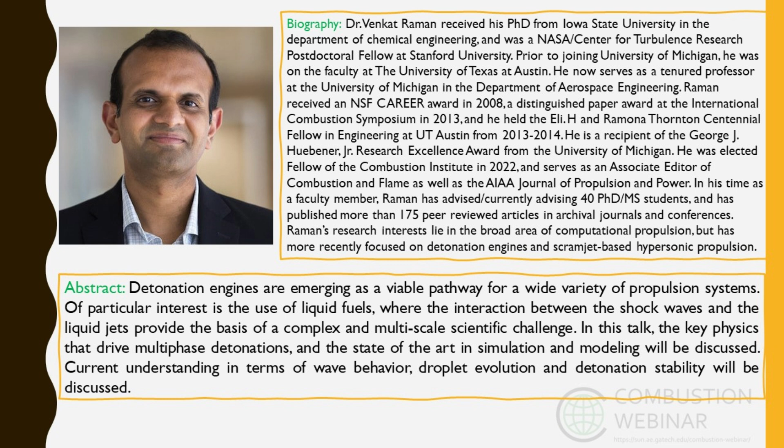The time is yours. Thank you, Peng. Thanks for the introduction. I have to say, I look through many of these webinars because it always shows up when I search for something, and it's always interesting to see what people are talking about. So it's a great effort to get people to come in and present.

So I'm very excited to talk about this, detonation engines. I've been working on this for 8 years now. We got started in 2016 when the Department of Energy wanted to look at detonation engines for application in gas turbines. And so we started looking at what it means to simulate these engines, what are the core physics. And over the years, we've learned a number of things, some good, some bad, but this is what we have learned. So I'll go through them.

This talk is in two parts. The first one focuses mainly on the gas-based or gaseous detonation engines, and the second part on the challenges with liquids. Now, the gas phase we understand a lot more clearly because it's simpler compared to the liquid phase. So the tone is different for each one of them.

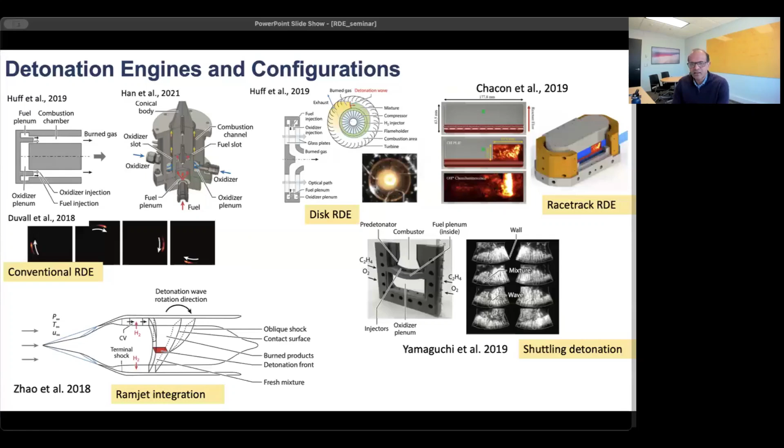And of course, all of this can be integrated into any flow path, whatever Mach numbers. So this, for instance, is an example of integration into a ramjet, and it can be put into scramjets and so on. So it's very versatile, and so that's the main advantage here. Now, of course, none of this comes without a price to pay, right? So why don't we have functioning detonation engines today that are as good as gas turbines?

And the problem comes from the fact that if you think about detonation, they're always studied using premixed fuel-air mixtures. So this is the typical system that's used for detonation research. RDEs, like the picture shown on the left, sort of go away from this ideal scenario. So in detonation engines, you can see that there are 2 cylinders, and between the cylinders, there's a detonation wave that propagates in the circumferential direction, and fuel and air are fed from the bottom, and they mix, and then the mixed mixture is what is being detonated.

Now, because this mixing happens through an unsteady process, it's never complete. You do not get full fuel-air mixing. There's always a distribution of reactants. So the equivalence ratio changes across the system. As a result, the detonation waves are never ideal, and they are actually far from ideal.

And so their structure is very dependent on the mixing, like how well you mix things changes what kind of detonation you get. Not only that, you may not have one detonation wave, but multiple waves that are moving back and forth, sometimes together, sometimes in opposite directions, and so on. And they're very geometry dependent. So in this sense, it's almost like thermoacoustic instability. So you cannot study them in abstract and hope to reproduce a practical system. You really need to study the system itself because wave reflections, interaction between injectors, all of these things become critical. So it is a complex device.

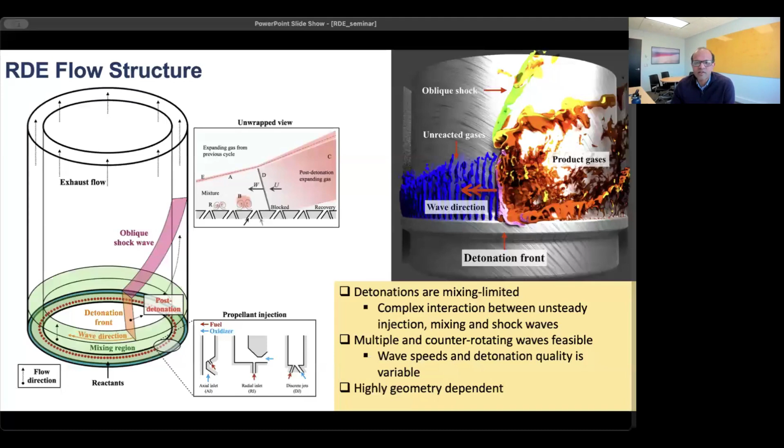So the way I want to talk about it is: what are the non-ideal natures of detonation engines? What is it that we need to focus on? What computational tools have we developed to address these issues? And what do we know about liquid injection in the same systems? Because if you have practical gas turbines or propulsion systems, you do not want gas injection alone. It has to be liquid injection.

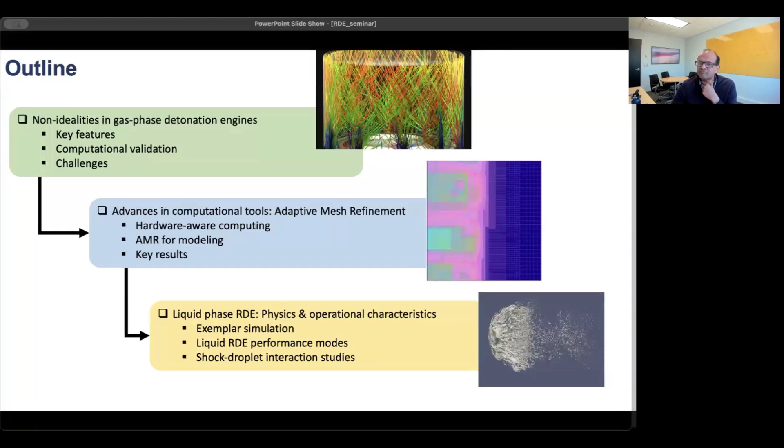So for the computational approach, there are many different ways to think about it. But if you look at the most detailed simulations, they all solve Navier-Stokes equations. They capture the shock, which is a requirement. You cannot fit the shock because the shock is moving very fast. You need to have an adequate resolution of the shock and reaction structure. And the large-scale motions, you need to be able to capture them. In addition, you need to be able to capture the geometry also, which can be sometimes quite complicated.

So the bottom right shows a rocket RDE from Air Force, which has a fuel injector on the inside and an oxidizer injector on the outside. That's only one pair. I think there are 72 of these pairs around the circumference. So this is a very complicated system overall.

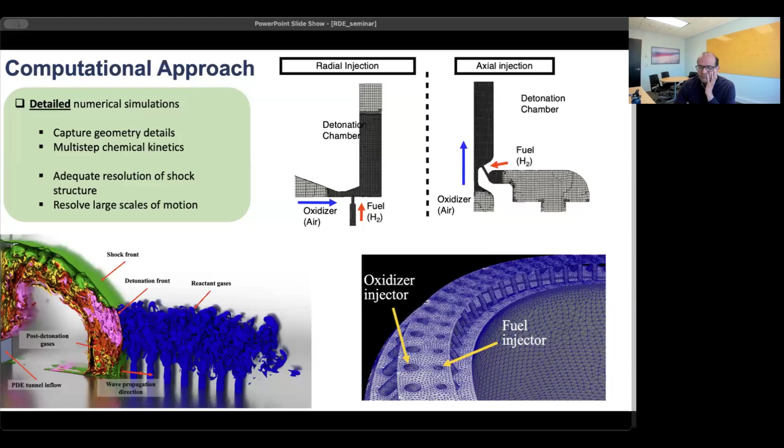So if you solve this flow, if you run these codes, what you see here on the top, these are movies, and once I click somewhere, it's going to start running. But before that, the top half is a geometry from Air Force. The bottom half is a geometry from University of Michigan from my colleague, Mirko Gamba. And these are nominally operating at roughly similar mass flow rates, similar inflow conditions, hydrogen as fuel, air as oxidizer. But only the geometry is different.

And so if you see how this works, oops, that's not right. You can see the waves moving around. So in the top picture, you have two shock waves, two detonation waves that are moving together in the same direction. In the bottom picture, you don't see it right now, but it'll come back from the other side. There's only one detonation wave.

And what you can see on the right-hand side is a cut of one of the injectors. So there are hundreds of these, 120 injectors, I think, in this configuration. So this is one of them. And if you look at the cross-section, as the detonation wave progresses, goes over the injectors, they shut off because the pressure is too high inside and the pressure is not high enough for the fuel to inject or the air stream to inject.

So as a result, as the wave goes through, the injectors are shut, and after some time, the pressure expands outside. The injectors are unfrozen, so they start releasing their charges, and at that point, mixing again starts. So it's this stoppage of flow, flow blockage, that's the critical aspect.

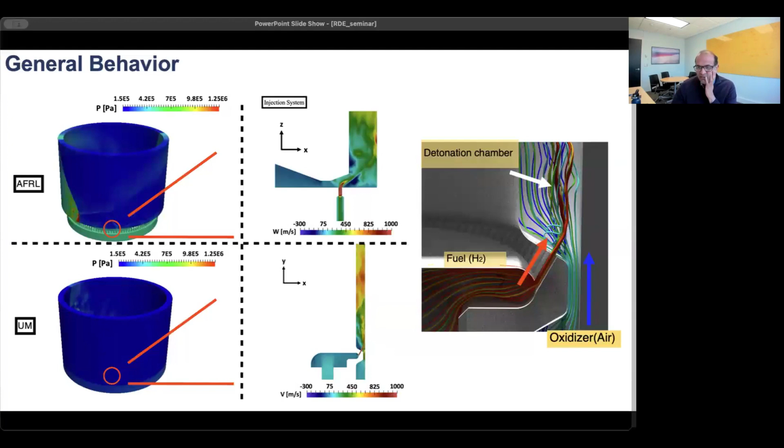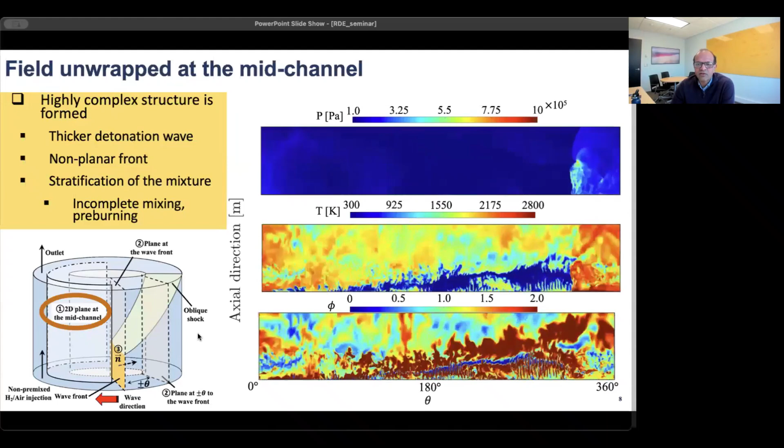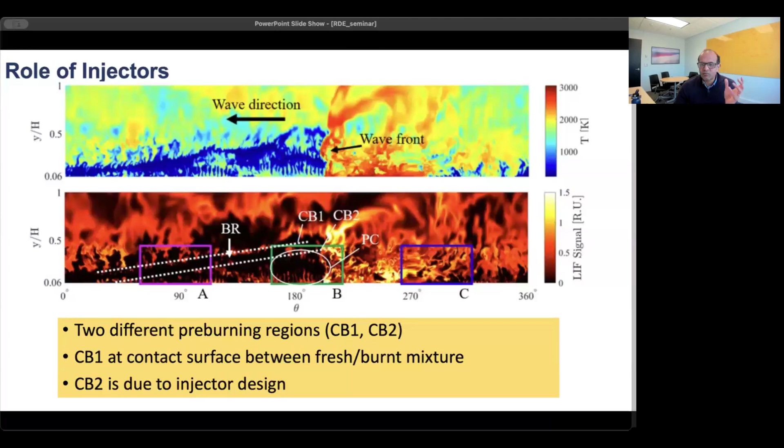And this variation is one of the key aspects that we really need to understand, the stratification of the fuel-air mixture. So if you think about the physics of the problem, what really matters is the fact that as the wave is moving, in front of the wave, the fuel and air is mixing in a very hot gas that's from the previous cycle of the shock wave. And that causes some kind of pre-burning, and it releases some of the heat at lower pressure. So that's a decrease in efficiency. And then whatever leftover fuel and air remains is now processed by the detonation wave. So there's this coupling between this pre-burning and what you have for the detonation itself.

All of this ties to what we call injector dynamics. So if the detonation wave has very different strengths, the way the injectors block and then release themselves will change. And so the level of blockage, the time for which they are blocked, all of this controls how much stratification you will get. So for instance, if the wave blocks the flow for a predominant part of the cycle, the fuel and air have very little time to mix before the detonation wave comes through. And so you will have a very stratified mixture through which the shock wave has to progress.

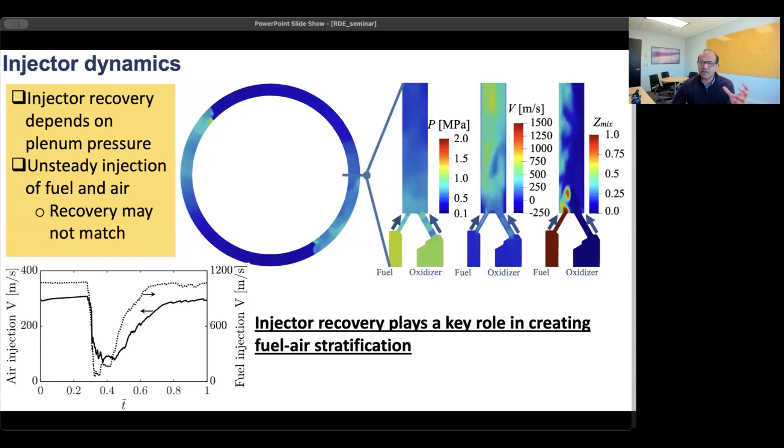So there's some kind of adjustment. The shock wave and the detonation wave respond to the fuel injectors, and so they set up some kind of equilibrium. And there's a coupling between this detonation process and the injection process. We will come to this in a second, but it's important to understand that the injectors are very critical for what's happening within the system. And if you change the injectors, you can change what kind of waves you get and what kind of wave speed you get.

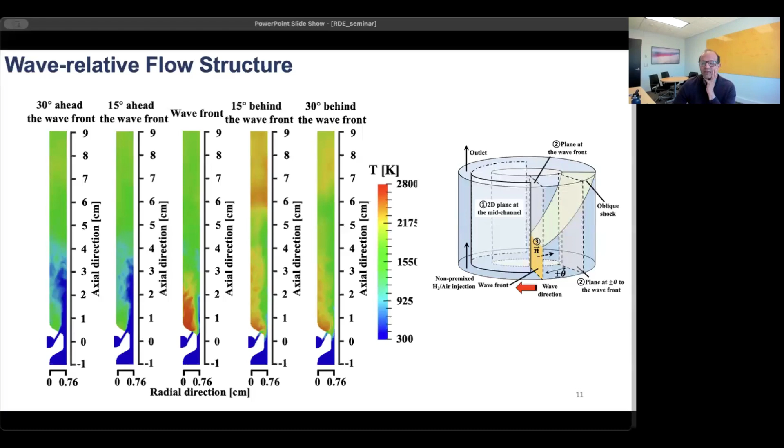So this is more details. It's not critical for now, so I'm going to skip this particular slide. What I want to get to is this coupling. And this is one of the lessons we learned from our study of the hydrogen combustor, is that there is a coupling between small scales and large scales.

But once you set up this stratification, there's a detonation wave that passes through, and that detonation wave now will have a particular strength, and that strength really depends on the stratification and so on, right? And so you'll have a certain number of waves, which we do not know how to estimate ahead of time, and they will have some wave speed that it goes through. And again, this wave speed and this number of waves dictates how fast the injector will recover.

So there is this coupling between the injectors and the detonation process, which is the entire RDE. And the funny part is we know this coupling exists. We're now able to write it, but we are not able to figure out yet, and no one has figured out yet, what's the link between them. So for instance, if I design an RDE today, I cannot predict ahead of time how many waves will be in the system and how fast those waves will go. So there's no way to know.

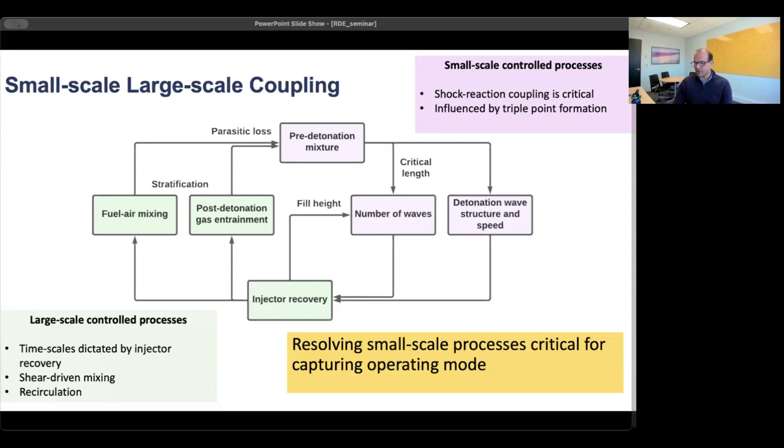All we can do is experimentally study it and notice how many waves we have. There are certain things we can figure out. Like for instance, if you keep increasing the mass flow rate that goes through the injectors, we know that more waves can be formed. So that's almost given. But we cannot predict a priori what we call the operating mode of the RDE, number of waves and the wave speed. So this still remains a very big challenge. So that's what this slide tells you.

Like, we can predict certain things, maybe like pressure or things like that. But if you really look at the details, simulations very rarely predict experiments accurately. You cannot predict the wave speeds in the experiments. And if you do predict the wave speeds, what you'll find is the pressures that you predict are not correct. So there's something missing in the simulations that we have not yet figured out. It's unclear. And different people will say different things. It could be chemistry, it could be the numerics that we use, it might be lack of resolution. So there are all these variables that are still there.

But this is common. Like, some simulations do show good agreement with experiments, but then we do not know what is the reason for that agreement either, because the methods used are very similar and so on. So this is something to keep in mind. Now, if you really want to make another step towards understanding these RDEs, the best thing that can be done computationally is to make sure that the detonation waves are fully resolved. You put as many grid points as possible to get all the structures within the detonation wave.

And typically in the field of detonations, adaptive mesh refinement has been used for many, many decades now. So starting with Professor Elaine Oran in the 90s, the use of AMR has been very prominent. So this is something that's very common. What has happened more recently is that these tools have been scaled on supercomputers, so we can run much bigger problems now than what was feasible before.

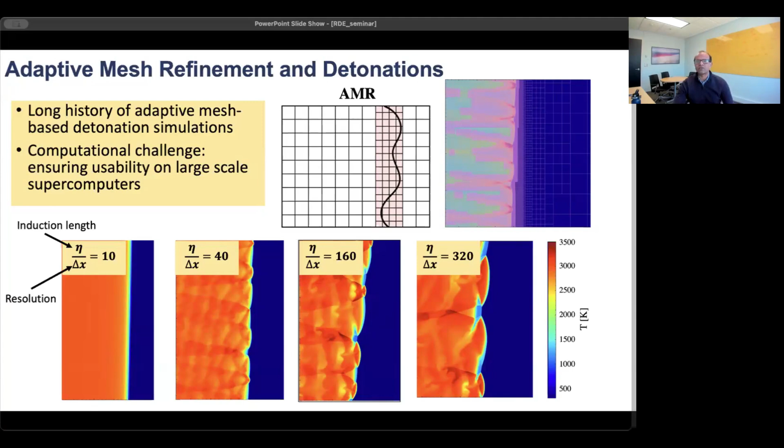And if you go to 160, you see these jets that come out. And if you go to 320, they're much sharper, but the structure does not change all that much beyond that. So what this tells us is that you need grid resolutions comparable to about 200 grid points per induction length, which is a very difficult task for practical detonation engines. You need a very large simulation capability to do something like that.

The other point I want to make, and I always talk about this, and I want everyone to understand what is going on in the supercomputing world, because sometimes this information is lost in all the messages that come out. Fitting these big calculations on a supercomputer is not a trivial task, and anyone who does supercomputing will easily understand this. What has happened with supercomputers in the last 10 years or so is that we have become more and more reliant on certain kinds of specialized hardware that are typically designed for machine learning applications, not for the kind of computations we do.

And as a result, what has happened is that we can do a very large number of grid points, like billions of grid points, but only for a very short time, like microseconds or milliseconds.

What we cannot do is very small number of grid points for hours of simulation. We cannot do that. So if you take an RDE and you want to see what is the temperature on the walls, to reach the thermal steady state, you'll have to simulate maybe like 20 minutes of RDE operation. That's virtually impossible today with any calculation. If you look at most simulations, they run for about 5 to 10 milliseconds if you're lucky. That's the longest duration that it's run.

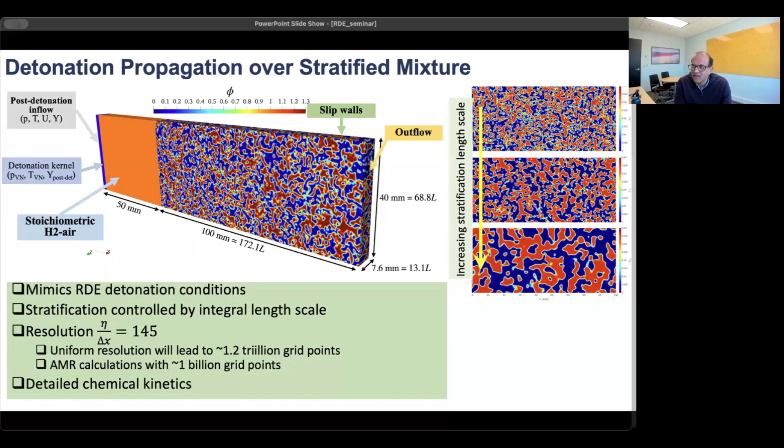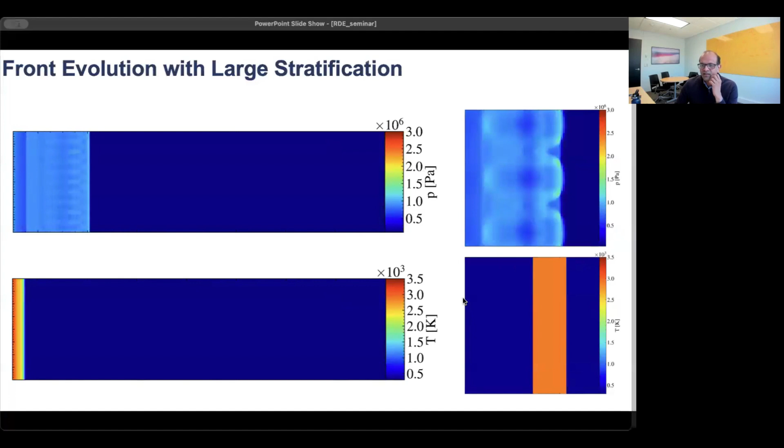So I'll show you a picture. I don't know which one of these I need to click to make it work, but I'll run all of them simultaneously. On the top is pressure, bottom is temperature, and on the right-hand side, they're zoomed-in versions. And they're going through the stratified mixture, and you can see that the detonations are no longer very regular. There are pockets that are unburned. The wave moves in different directions, and they're in general less efficient at processing the fuel air mixture than if you had a uniform concentration across the domain. So this is the kind of result that we were looking for to really understand what is the role of stratification.

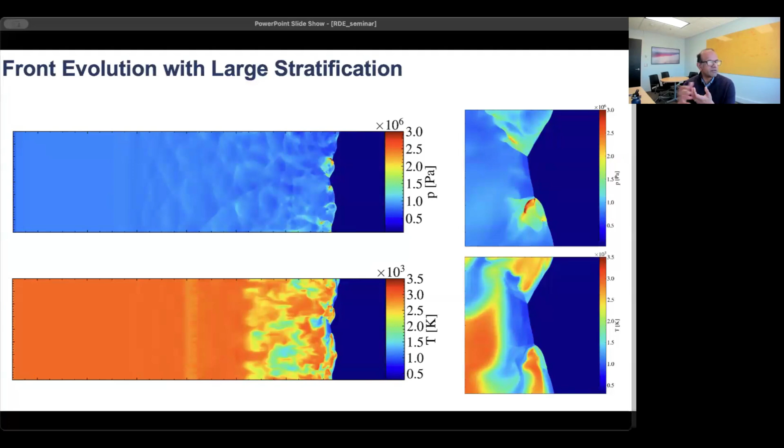So what it tells us is that if you have stratification, there are pockets that are unburned, and as a result, the heat release that would have come from burning those pockets is not available to push the wave. So the wave sort of slows down because of this inefficiency. There are more details here, but essentially, what the process tells you is that you have a very different kind of detonation wave compared to what you would have for a uniform mixture.

So I have these movies on the right-hand side, which tell you how this detonation front looks if you vary the fuel air mixture over small length scales as opposed to a larger length scale. And you can see here that the corrugation and the change in location really depends on the stratification. So if you have large scale stratification, big blobs of fuel and air everywhere, the wavefront is very corrugated. It can look like a premixed flame that's corrugated. But if you have smaller length scales, then it's almost straight. It doesn't have that many corrugations.

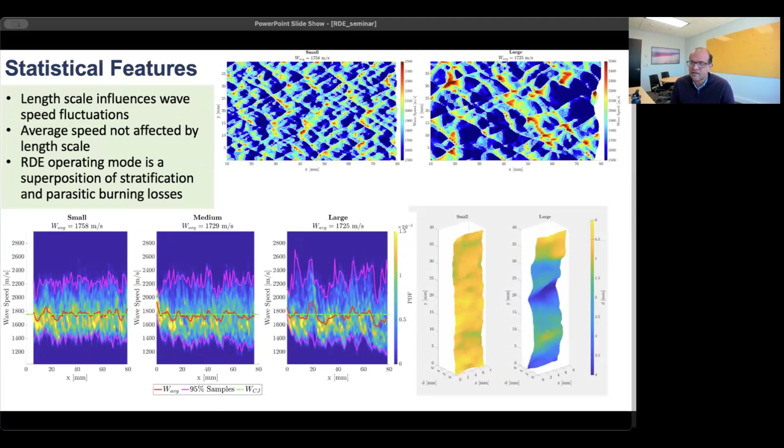So that is what we learned with gas phase RDEs. One of the main things is that there is a coupling between large and small scales. But the second important point is that there's inefficiency because you're not able to put in fuel and air uniformly. And so there's some loss of efficiency that comes from this. Now, whether it's good or bad is open for debate. That's a different topic, and I'm happy to explain this later. But we do not know if we need to have uniform fuel air mixture. But we do know that it has to mix to some level. Otherwise, you cannot sustain the detonation.

Now, practical devices cannot use gases. They have to use liquids. And so we started looking at liquid-fueled RDEs. Some of the pioneering work was done at University of Michigan like 60 years ago by Nicholls, and then a lot from Russia.

And now a lot more work is being done in China. And Piotr Wolanski, until he passed away a couple of years ago, was the preeminent researcher in Poland for these kinds of systems. And more recently, there's this experiment from Karim Ahmed at UCF on a detonation where we just saw it pass through, hitting a droplet, and you see what happens to those droplet structures.

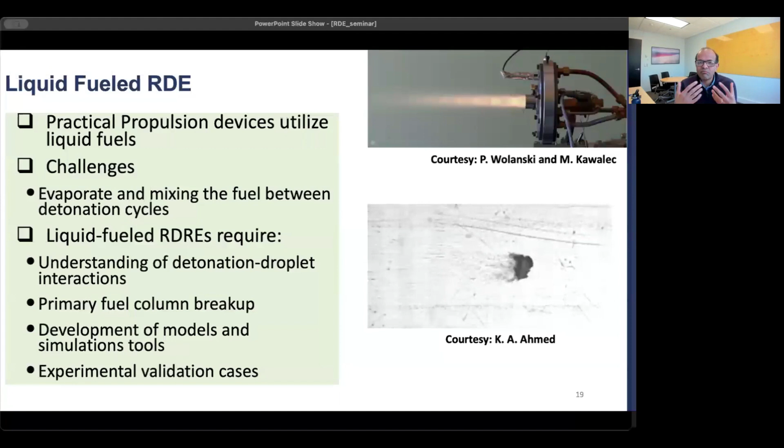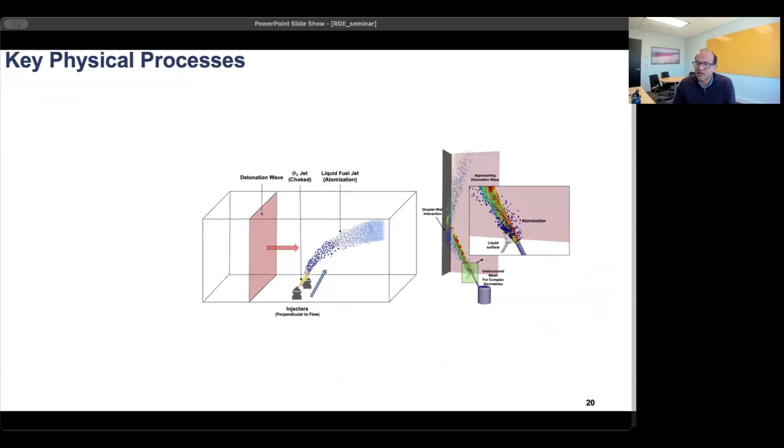So the real idea we want to understand is what happens if you have a liquid fueled RDE. What do we need to understand to make that function? So this is the main question we have. Now, there are many physical processes. This is as complex as you can imagine. If detonations are complicated, liquid fuel detonations are 10 times more complicated. So there is, first of all, the interaction between the shock or the detonation wave and the liquid jet. So it's going to atomize or do things like this.

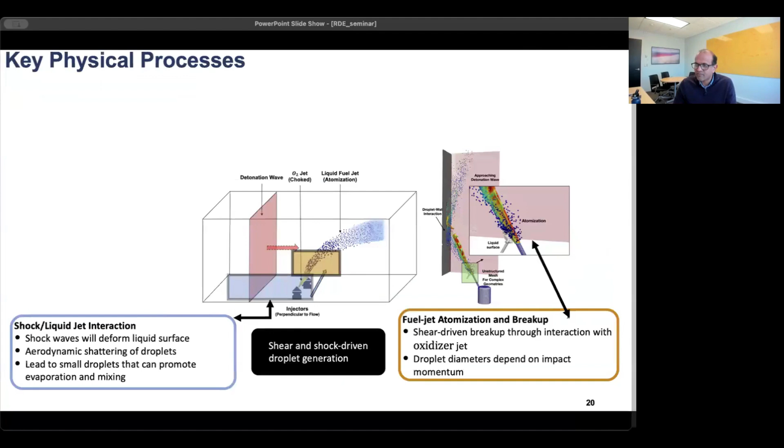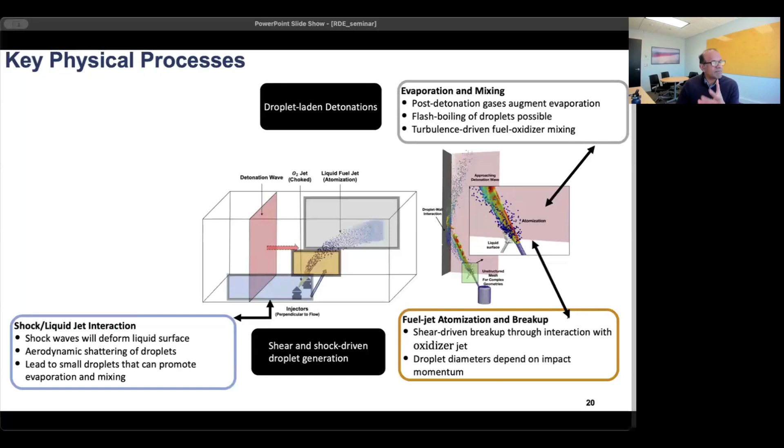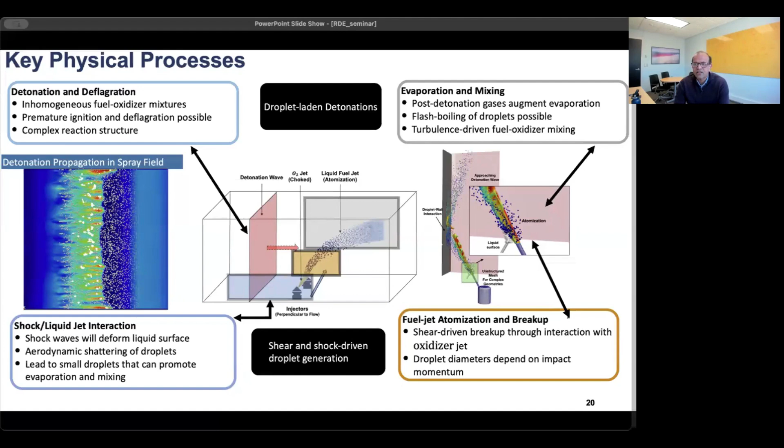So we've done some very preliminary studies. I know there are other works now looking at full-scale RDEs with liquids, but they're all very preliminary. We are just starting to look at this. So this is not a very mature area yet. So we took this rocket RDE design from Air Force, the one that I showed some time back. And what we did was to just inject liquid through it. So instead of gaseous methane, which is what it was designed for, we inject liquid RP2 through it. And then we change the diameter of the nozzles and things like that to change mass flow.

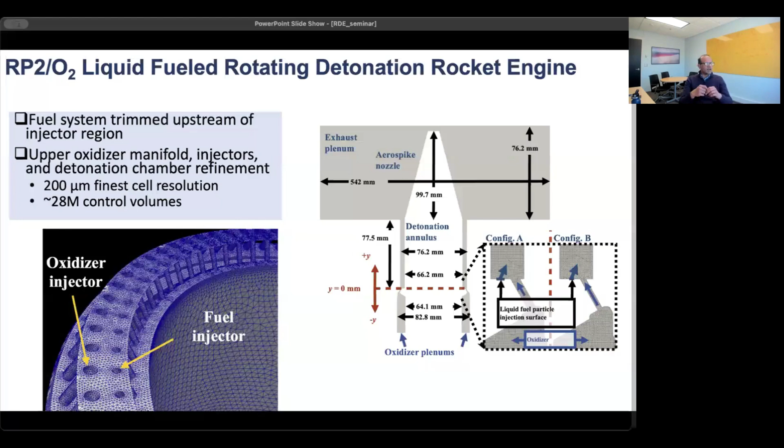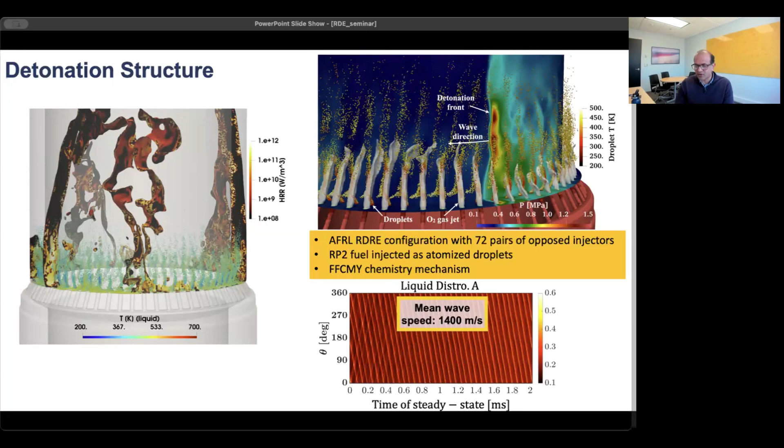So what you see on the left-hand side is what should be a movie, but now it's an instantaneous picture of heat release rate and the detonation waves moving. So there are about 3 waves in this, if you look at it. And of those 3 waves, you can see that the waves are not straight or they're not simple. They're quite corrugated. They're spatially extended. And this feature comes from the fact that evaporation is not very rapid in these systems. So there's a time delay for fuel release, which controls all of this.

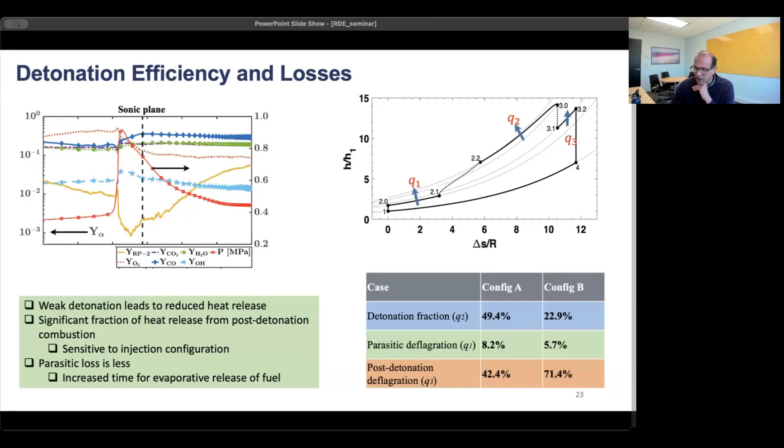What we find here is that for liquid fuel RDEs, the detonation fraction is about 50% for one configuration. And even if you make a slight change to the nozzle, it drops to like 20%. Okay, so there's a huge sensitivity to geometry, which is not seen in gas phase RDEs. And so we really want to understand what is going on here. Why is there such a big difference in efficiency? So that requires us to understand how detonations interact with droplets, which is something that people have not really looked at carefully. So we have an operating theory for what is going on here.

So in liquid fuel RDEs, there are two different kinds of detonations that can happen. The first one, which I call decoupled detonation, is where you inject fuel and air, they atomize through shear, the jets interact, they atomize. And when the shock hits it, it becomes smaller droplets, but the droplets are still quite large, so they cannot immediately evaporate.

So the detonation just goes by, it doesn't do much. Then the droplets sit and evaporate. So they have this time for the wave to come back during which they evaporate. And when the detonation wave comes through, all it's doing is burning this evaporated mass. So in this sense, it takes 2 cycles to really evaporate or burn the fuel that you're injecting. So this is the decoupled detonation where detonation propagates over just a heterogeneous gas phase mixture.

What we really want to get at is a problem where the detonation wave hits the droplets, completely atomizes it, evaporates it, and burns and releases the heat before the sonic plane that cuts off heat release impact on detonation happens. So this is a coupled two-phase detonation. And if you think about it, there's so many things happening, and this length would be roughly 5 millimeters, 10 millimeters. That's the total length that you have to really execute all of these physics, which seems pretty difficult.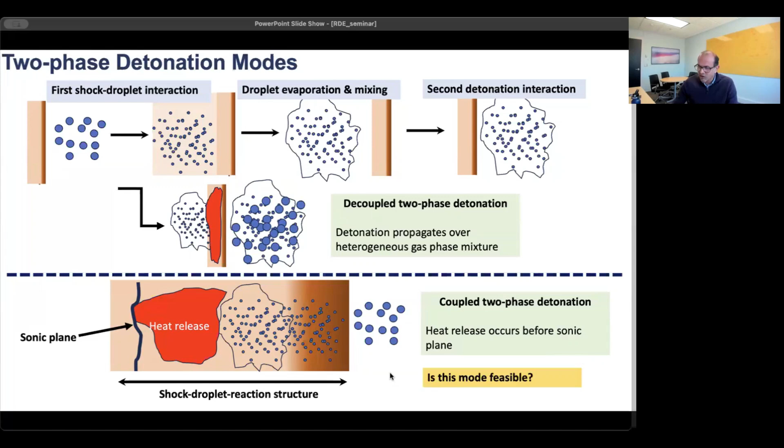But it turns out that there are experiments that seem to suggest this. And this is the whole interest in liquid fuel RDEs in this country right now. So I call it the coupled two-phase detonation, and we wonder if this mode is even feasible. And there are many experiments now that have come online. So when I made these slides, this experiment from Kareem was the only one that showed this. Since then, Jason Burr at AFRL has shown similar results, and now Kareem has shown other results that sort of seem to confirm this coupled detonation mode.

And essentially what he did was this: he took this long detonation tube, he had a single pair of injectors that inject liquid RP2 and oxygen into the system, and then he filled the whole tube with hydrogen and oxygen, which seems very dangerous, but that's what he did. And then he sent in a detonation wave. So the detonation would propagate in gas phase, come close to this injector, hit the droplets, and then it will pass by. And what he measured on the top is the detonation velocity.

And when you measure the detonation velocity, what you observe is that the detonation velocity is initially like 1800 meters per second or something. So the x-axis here is time. You can think of this as distance traveled also. When the wave velocity hits a minimum, that's when it encounters the droplets. It's sort of quenched. But then after it passes the droplets, it jumps back up to very high values. It goes to like 2100 meters per second. And then as time progresses, it slowly goes down and reaches the initial value, which is about 1800 or so.

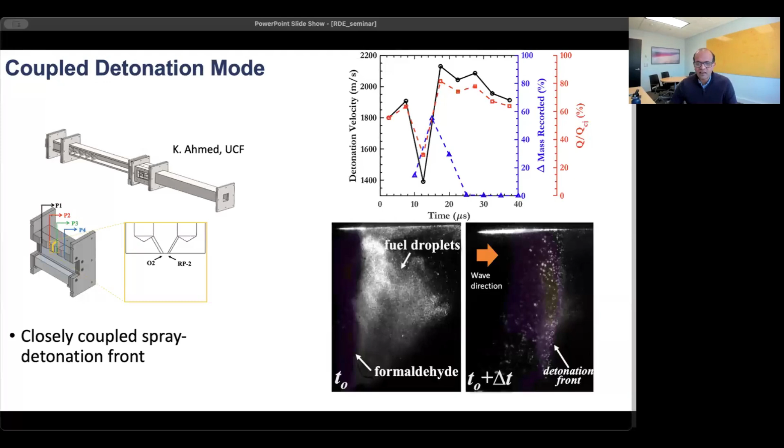So that jump from very low value to 2100, he inferred this to be based on the RP2 droplets undergoing this coupled detonation mode. So this was his inference. And at that time, this was the only data. So there were a lot of other competing ideas for why this was happening. But now we know that his inference was correct. This is what is happening.

If you do the same with simulation, so the top is a simulation of the exact same system, you will not reproduce this information. In the simulations, the velocity will drop, like what I show here in the bottom left plot. But when the velocity goes back up, it only reaches the same velocity as what it had before. It will not go above that value.

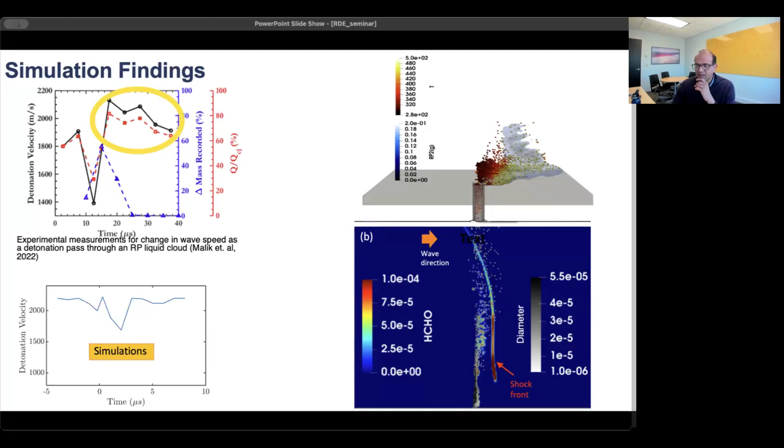And if you look into the details, what you will find is that the droplet evaporation happens much later compared to where the shock front is located. So they are not coupled. So the simulations are not able to model the coupled interaction. It can only model the decoupled interaction. So this is a fundamental limitation of the computational models that we have. So if we have to make progress, we have to understand how droplets interact with detonations. So this is what we started looking at.

And there are many other studies we have done since then, but I just want to show you what we're doing here. So this is a two-phase simulation where the droplet is fully resolved using a diffuse interface approximation. We take into account many factors to make sure that the values we get for things like temperature and pressure are physical, which is not always the case with these kinds of simulations.

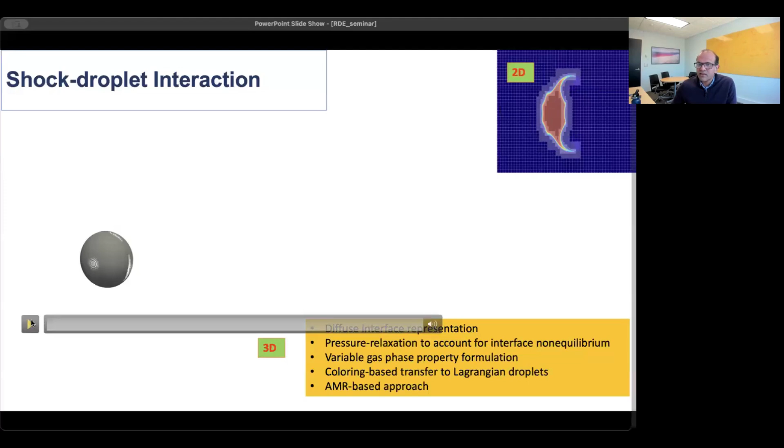So if I now run this, here you have a 3D droplet hit by a shock wave, and you can see that droplet flattening and then rupturing, right? And then it becomes these millions of small droplets. And what we know now is that these small droplets are actually not droplets, but they have already been released in vapor form because of high temperature. So everything that you see in the cloud behind is actually in gas phase already.

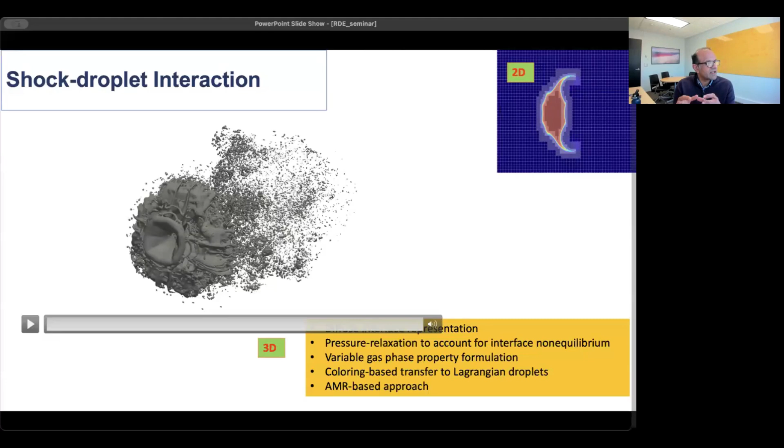So it only needs to mix and will start burning very quickly. So this is a very interesting and exciting development. And what we know now is also that if you change the Mach numbers and if you change the diameters, there's certain patterns that emerge on how these things collapse. And much of this is only driven by inertia. It's not driven by surface tension or other properties. It's only inertia that causes this rupture, the inertia of the shock hitting the droplet.

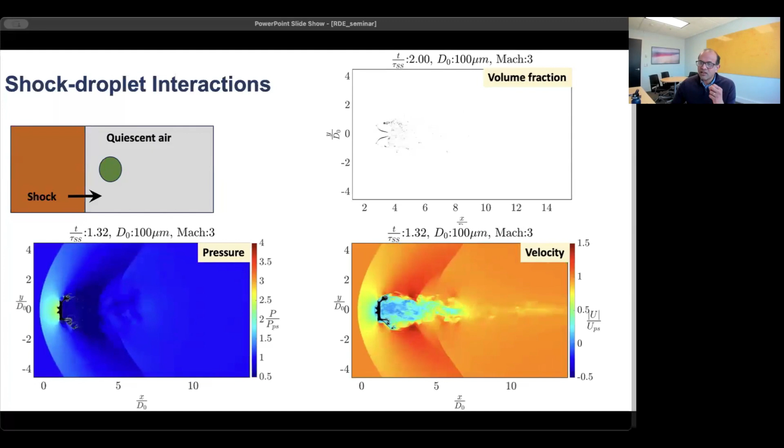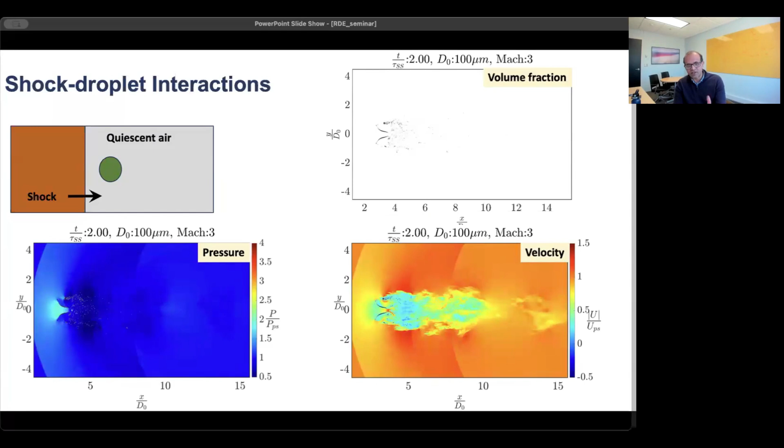So I'll show you some examples here of what's going on to drive a more important point here, which is that if you look at what's happening, the droplets break down and form a droplet cloud behind, which is spread out. So they're not all right behind the droplet. It actually spreads quite a bit. And you have this pressure and velocity that are also changing, which is very high in front of the droplet, but drops quite low behind the droplet. So this is that Mach 3.

But if I go through what happens for different Mach numbers and diameters, there is a scaling that was originally proposed by Nicholls based on inertial theory. And that scaling seems to work remarkably well in describing what goes on. So here, for instance, there is a time scale that you can define based on droplet diameter d0, the shock induced velocity u, and then the ratio of the densities between gas and liquid phase. So that gives you a time scale. And regardless of your Mach number and droplet diameter, the complete disintegration happens in 3 to 5 of these time scales, which it turns out is a very short time.

And so this sort of tells us that there is a possibility to get coupled detonation if the initial shock is able to rupture the droplet very quickly. And we have done some studies to show that if the shock is what is causing the rupture, that breakup time can be as short as 5 microseconds. And remember that these waves are moving at about 2,000 meters per second, 2 kilometers per second. So if you look at distance, that would be about 10 millimeters. So you can have all of the droplet breakup and evaporation happen within 10 millimeters. And so ignition can happen within a millimeter or so after that.